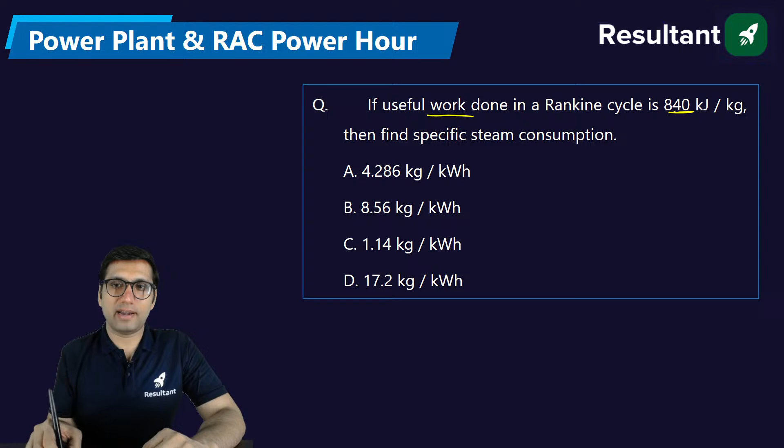Let's quickly cover the first question. If the useful work done in a Rankine cycle is 840 kJ per kg, then what is the specific steam consumption? Whenever such questions come in the exam, you need to know the formula to solve it. The specific steam consumption, also known as steam rate, can be found using the formula 3600 by net work.

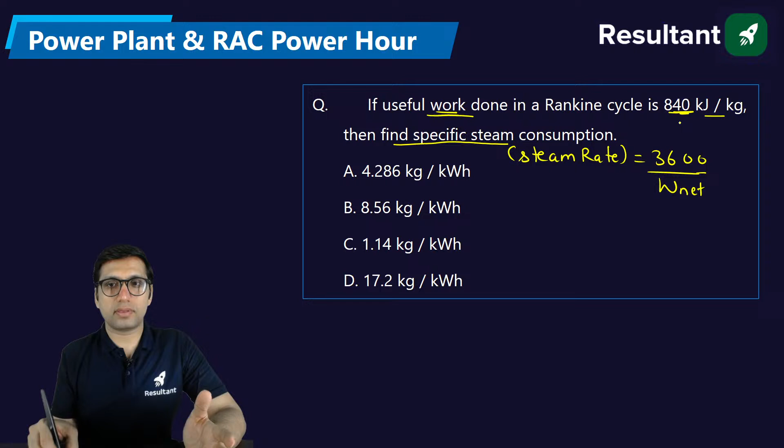In this question, the useful work or net work is already given, right? So you just put the value here: 3600 by 840. The unit of specific steam consumption is kg per kilowatt hour. Okay, solve it and tell me the answer. What is the answer? Tell me, everyone.

So it's all about the formula. For the numerical part, you should remember the formula. If you don't, then no matter how good you are, you would not be able to solve the numericals. So for numerical part, you should know the formula. The answer is 4.2857, approximately 4.286. So that will be the answer for this first question.

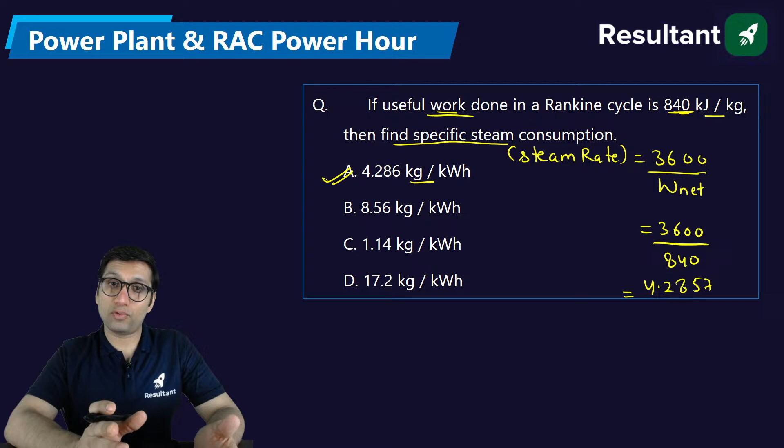So we can, but that's a very less number, guys, come on. Even if you are preparing for RRB JE CBT2, if you think RRB JE CBT2 is still going to happen after a long time, firstly there will be CBT1, then CBT2, then my dear students, there will be CBT2 of SSC JE also, right? And SSC JE CBT2 will be conducted in just 1.5 months, by October. So in the month of October, if SSC JE CBT2 will be conducted, then you should be ready for it.

Next question: which of the following is false for air refrigeration system? You have to tell the false statement, not the true statement. It is cheaper as air is easily available compared to other refrigerants. This air refrigeration system is cheaper, having less cost compared to others. So this is which of the following is false? You have to write the false one.

There is no risk of fire as compared to other refrigeration systems. The weight of air refrigeration system per ton of refrigeration is high. So this is a false statement, my dear, because the main advantage of air refrigeration is written wrong here.

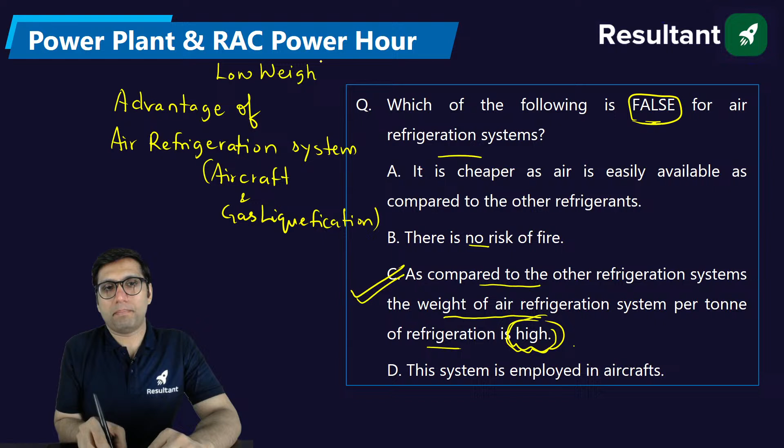Air refrigeration is employed in aircraft, and also gas liquefaction - this is the main application where we use this air refrigeration system. The main advantage is low weight per ton of refrigeration. If you have seen any theory session that I have taken, this is the advantage, and it is being written as a disadvantage here, which is of course not correct.

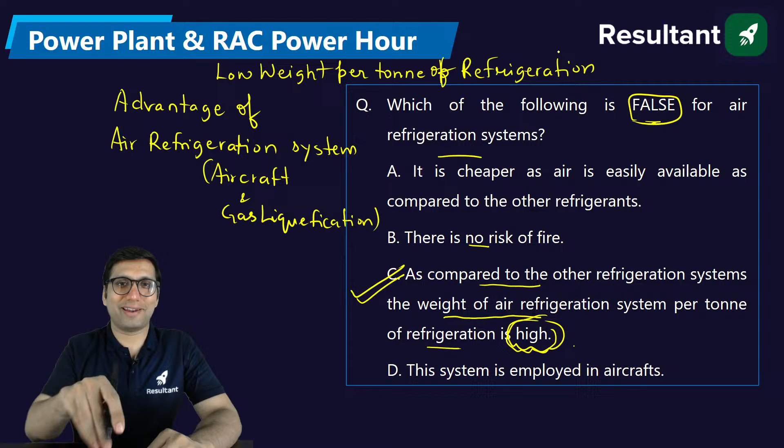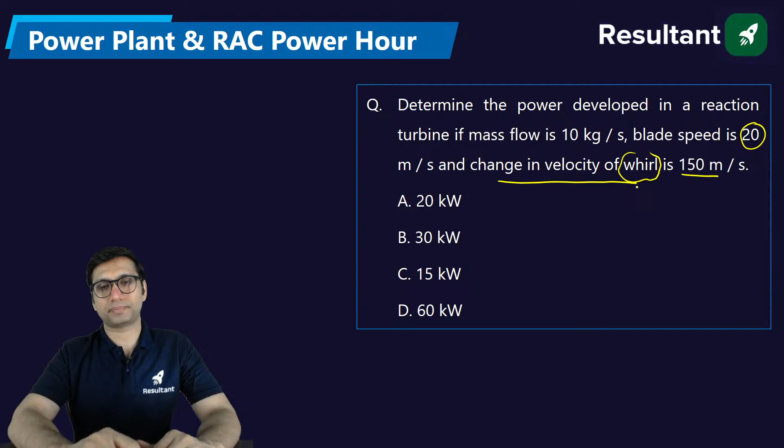Next, determine the power developed in a reaction turbine if the mass flow is 10 kg per second, blade speed is 20, and change in the velocity of the whirl is 150 meter per second. The mass flow rate is given as 10 kg per second. Again, same thing - if you know the formula. Blade speed is 20 meter per second and change in whirl velocity is 150.

But all this data will not be helpful if you don't know the formula for how to calculate the power developed. So how can you find the power developed? The power output of a reaction turbine is equal to mass flow rate into change in the whirl velocity into the blade velocity. Simple, you just multiply all three things and you get the answer. So it will be 10 into 150 into 20, giving you 30 kilowatt. Clear?

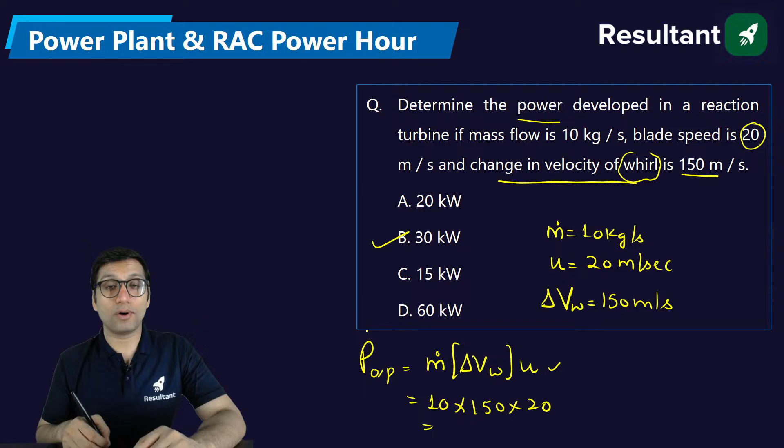If you find any new formula while solving or practicing questions, update it in your short notes for that subject, whether it's power plant, RAC, or any other. Because when you're taking a live class and understand a formula, your brain doesn't retain it forever, it will forget it after a month. If the same question comes in the exam, you'll forget the formula because you haven't revised it. So note down formulas in a short notebook that you must have made for each subject. If not, please make one.

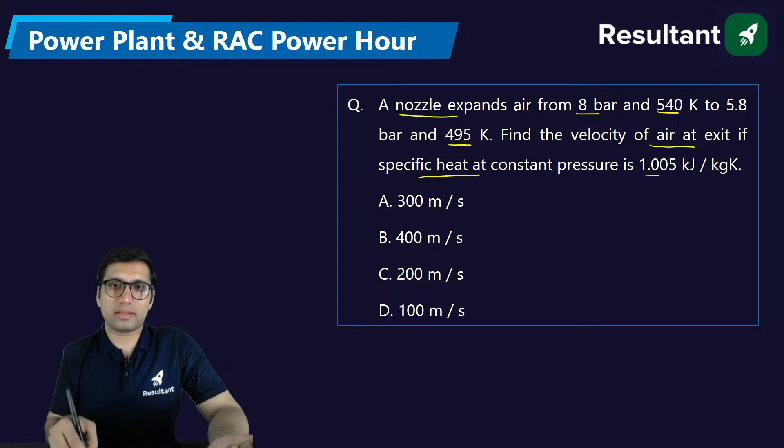A nozzle expands air from 8 bar and 540 Kelvin to 5.8 bar and 495 Kelvin. Find the velocity of the air at the exit if the specific heat at constant pressure is 1.005 kilojoule per kg Kelvin. How do we find the nozzle velocity at the exit? The formula is velocity equals square root of 2000 into change in enthalpy.

In this question, they have not given the enthalpy change directly. Since they have given air, and if we assume air is an ideal gas, then for an ideal gas, delta H equals Cp into delta T. So we can substitute this value: velocity becomes root of 2000 into Cp into delta T. Just put the values and you'll get the answer.

2000 into Cp, which is 1.005. Delta T is the temperature difference, from 540 and 495, so it's T1 minus T2, which is 540 minus 495. If you put the values in, you'll get the answer. Tell me what value you're getting by solving this. Approximately you'll get 300 meter per second. If you use a calculator, you'll get the exact answer.

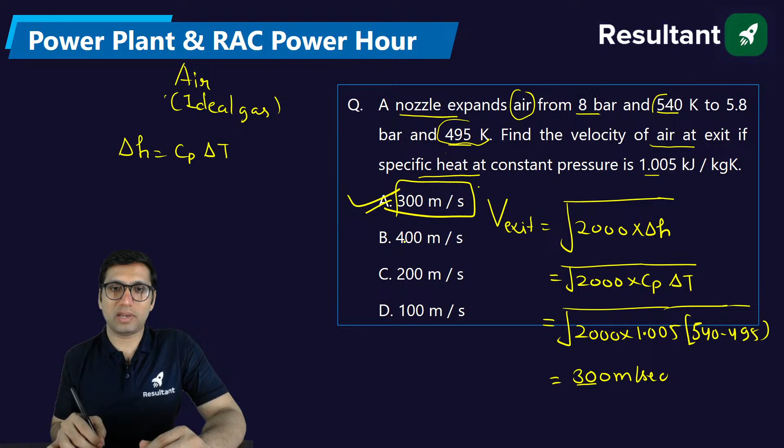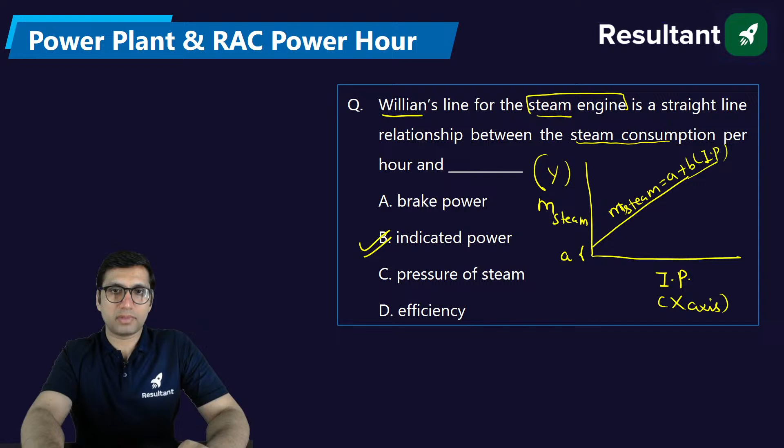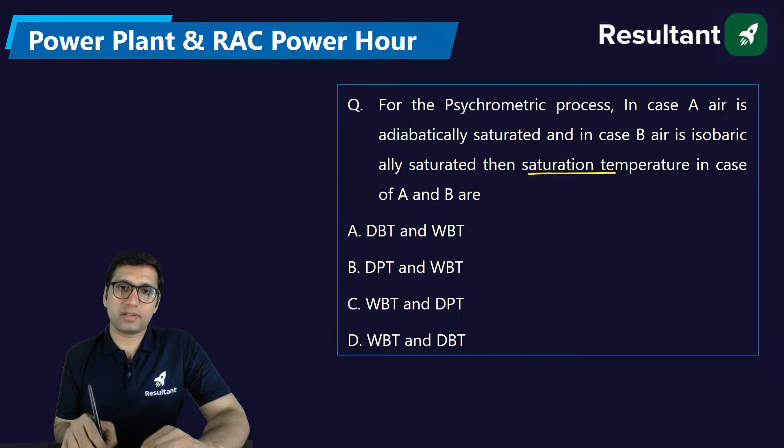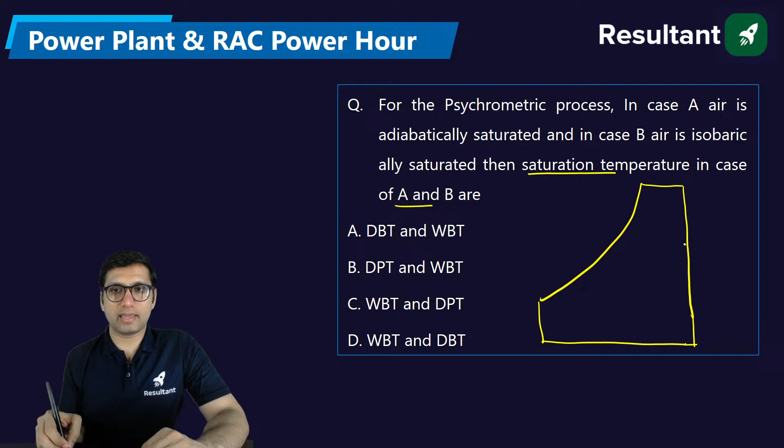For the psychrometric process, in case A, air is adiabatically saturated, and in case B, there is isobaric saturation of air. Then what is the saturation temperature in case A and B? Psychrometry, which you've studied in refrigeration and air conditioning, involves following two types of cases. In case A, we are trying to saturate our air adiabatically.

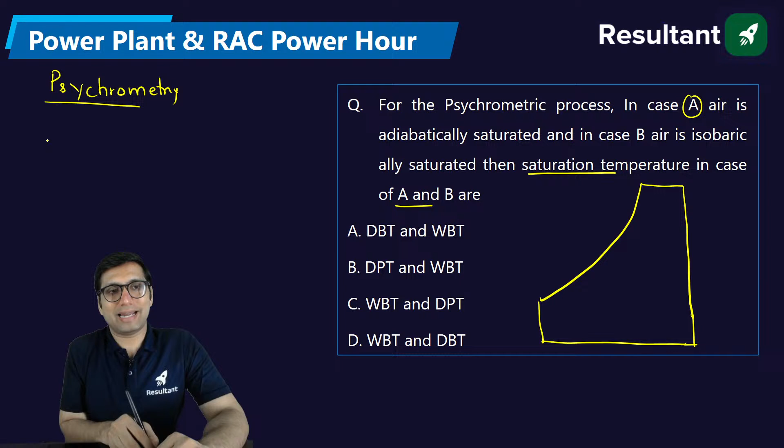With respect to psychrometry concept, two things are important. When we say adiabatic, with respect to psychrometry we are talking about constant enthalpy, a process where enthalpy is constant. And because enthalpy is constant, the wet bulb temperature is also constant. If you talk about isobaric with context to psychrometry, we are talking about pressure, but which pressure?

Vapor pressure is constant, and vapor pressure represents dew point temperature. Dew point temperature is constant. Dew point temperature means specific humidity is constant. So this is some basic concept that you need to remember.

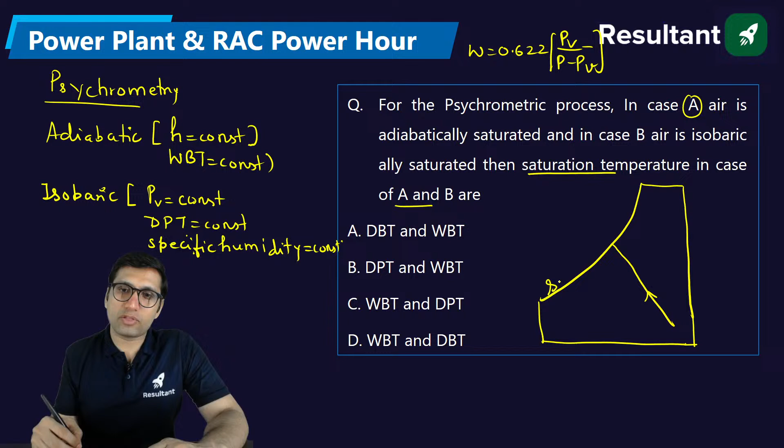Now let us understand how you are doing saturation. This is called the saturation curve. Why is it called saturation curve? Because on this curve, your relative humidity becomes 100%.

We have 100% relative humidity, air is fully saturated. In case A, we are trying to reach our saturation curve across constant enthalpy or constant wet bulb temperature. In case B, air is isobarically saturated. How do you do isobaric saturation? Like this.

Case number B: when we do isobaric saturation, that means pressure is constant, that means specific humidity is constant, and that means dew point temperature is constant. So in case A, you will get wet bulb temperature, and in case B, you will get dew point temperature. Clear? So option C will be the right answer.

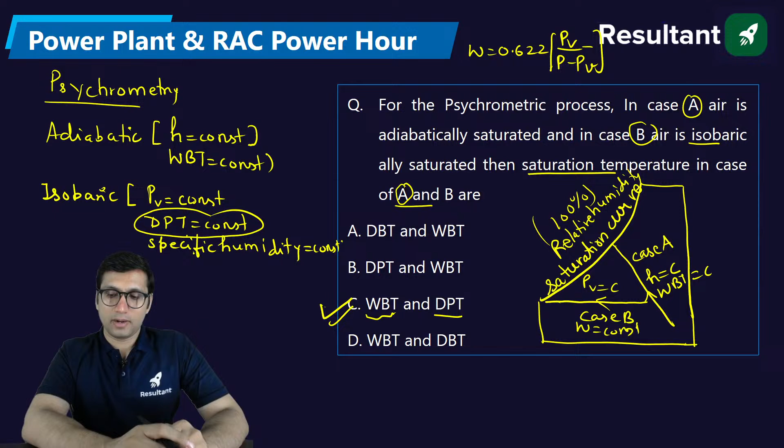Understood, everyone? Don't just remember this thing, don't just mug it up, because the concept is important. Next question.

Consider the following statement regarding steam turbine. The main objective of reheating in the steam turbine is to improve the dryness fraction. Why do we do reheating in the steam turbine? The main objective is to improve dryness fraction. Correct. The reason why reheating was preferred or used in the first place for the steam turbine is to improve the dryness fraction.

Reheating is to remove the wetness at the exit of turbine, because if we don't do that, the moisture at the exit of turbine will cause deterioration of the blades. It will cause erosion of the blades, the material of the turbine blades. So that is why we need to improve the dryness fraction. This is correct.

Reheating decreases the specific steam consumption. How does it decrease specific steam consumption? What are the effects of reheating? When we do reheating in the steam turbine, the main purpose is to improve dryness fraction. This is the main reason why reheating was adopted in the first place.

But with the effect of reheating, the net work will improve, and if net work improves, then steam rate, also called specific steam consumption, equals 3600 divided by net work. If net work is going to improve, this is going to decrease, right?

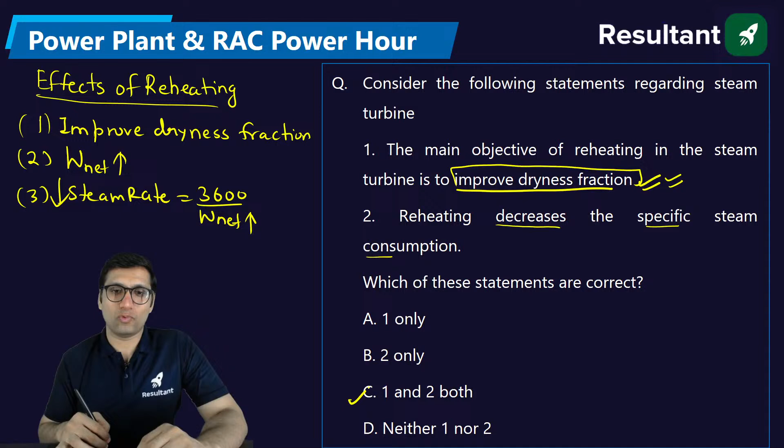So both the statements are correct. 1 and 2 both are correct.

Next is, consider the following statement about the compounding of the steam turbine. Now, compounding is a term which when we study about steam turbine, it is particularly the case where we try to remove some problems of simple impulse turbine. The simple impulse turbine has got some issues. Those issues have to be resolved, and because of that we do compounding in impulse turbine, not in reaction turbine.

Loss of kinetic energy at exit and high rotor speed are the two problems in the impulse turbine. To solve these problems, the solution is compounding. So the reason we do compounding in impulse turbine is to solve these two problems. These problems are not present in reaction turbine, so we don't require compounding for reaction turbine.

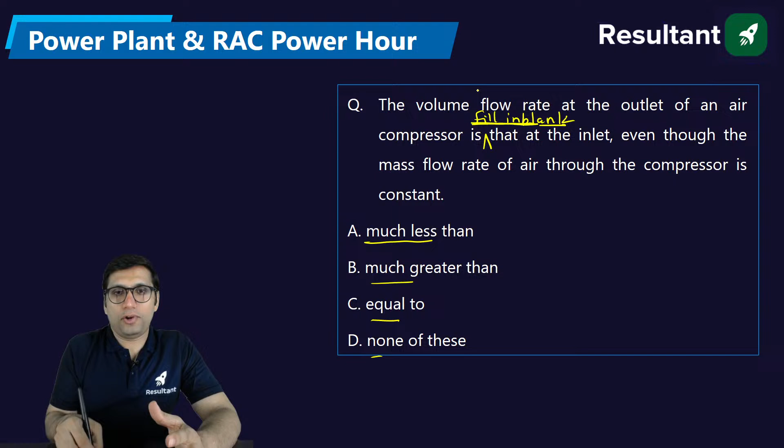So there are two things: one is called volume flow rate and one is called mass flow rate. Volume flow rate is also called discharge. But here, when we say volume flow rate, discharge at the outlet of compressor, is it much less than that at the inlet, even though mass flow rate is constant? That means what they are trying to say is, if in the compressor mass flow rate at inlet is equal to mass flow rate at the exit, that is, if continuity equation is maintained in the compressor, what do you understand by this?

Kya hoga sir, non-tech to accha nahi ho pa raha hai. So Gautam, you need to improve in the non-tech, right? The solution to any problem is not cribbing about the problem, but working on the problem. If you just keep worrying that non-tech accha nahi hai, to non-tech sochne se accha nahi ho jaayega. Agar main mota hoon, if I'm fat, if I'm bulky, if I'm overweight, then just by thinking that one day I will become lean, I will not become lean. I have to sweat it out, I have to do some exercise so that I can become lean. So the solution to any problem is to work on that problem so that you can come out with some good result. Non-technical sabhi ka problem hota hai. Abhi main bhi, if I have to give RRB JE exam CBT, let's say suppose, I may not be able to clear CBT 1 because I have not studied non-tech from a very long time, maybe from last 10 years. So you have to study non-technical, right? Just study it. Clear?

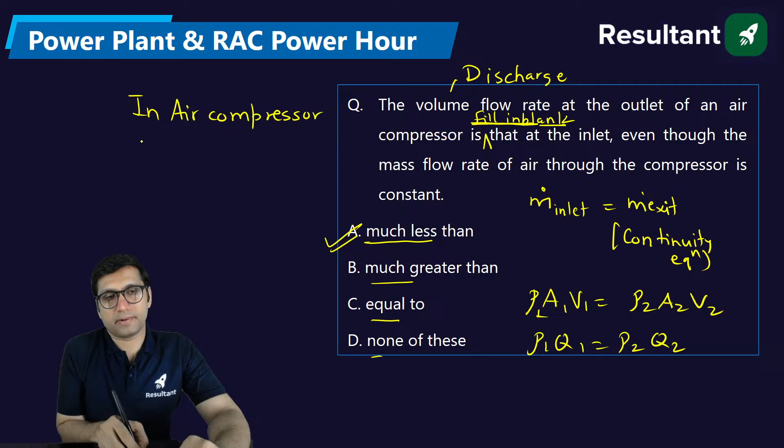So mass flow rate is equal to what? It is density into area into velocity. This is mass flow rate at the inlet: rho 1 A1 V1 is equal to rho 2 into A2 into V2. Now we know it very well that if mass flow rate is same, and discharge, we can write this as rho 1 into Q1 is equal to rho 2 into Q2. We know it very well that in air compression, try to understand the concept: air is compressed. And what is the meaning of compression, my friend? Compression means that pressure will increase. P2, pressure at the exit, will be more than pressure at the inlet because it is a compression. And we know that density is a function of pressure, so density at the exit will be more than density at the inlet. So in this particular case, in order to maintain mass flow rate constant, if rho 2 is more than rho 1, then Q1 should be greater than Q2. Are you getting my point? If this quantity is more, then this quantity has to be less in order to maintain constant mass flow rate.

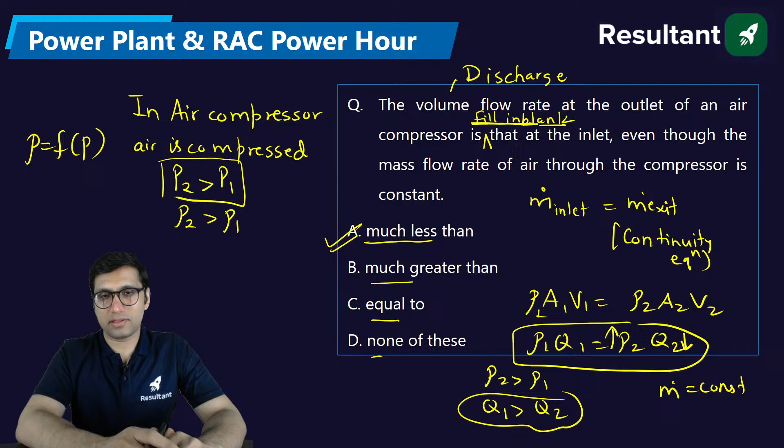Clear? So that is why discharge will be less as compared to inlet. Volume flow rate will be less. Clear to everyone? Is it a clear concept? Samajh mein aaya? Very simple concept, because we have to maintain constant mass flow rate, and how can it be maintained constant? We have to decrease the discharge accordingly because density is already increasing at the exit.

The isentropic efficiency of a compressor is defined as a ratio of the isentropic compressor work to the...

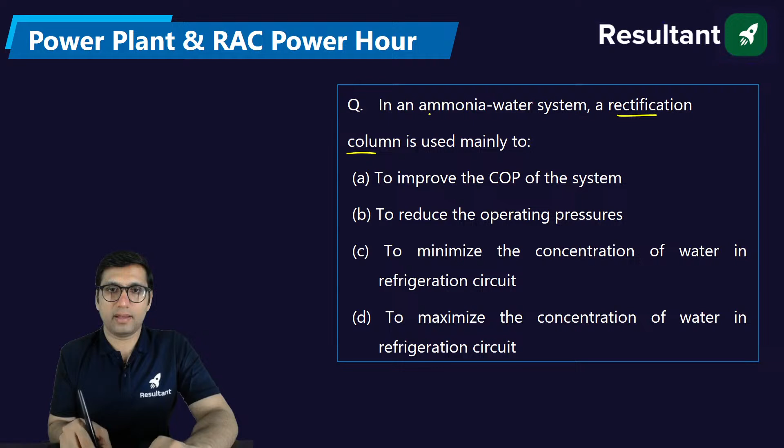Next, in an ammonia water system, a rectification column is used mainly to... why do we use a rectifier? Why use a rectification unit in an ammonia water vapor absorption refrigeration system? Why do we need a rectifier here?

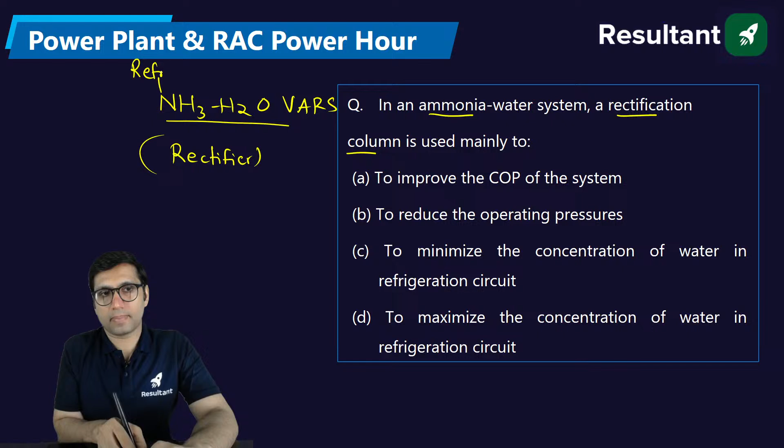In this system, ammonia acts as a refrigerant while water acts as an absorbent. Since ammonia is the refrigerant, it is the main fluid performing the cooling effect. But the problem is, when we heat the ammonia refrigerant, some of the water also becomes vapor. If this water vapor condenses in the condenser and goes into the evaporator, it might freeze and block the evaporator, especially the expansion valve.

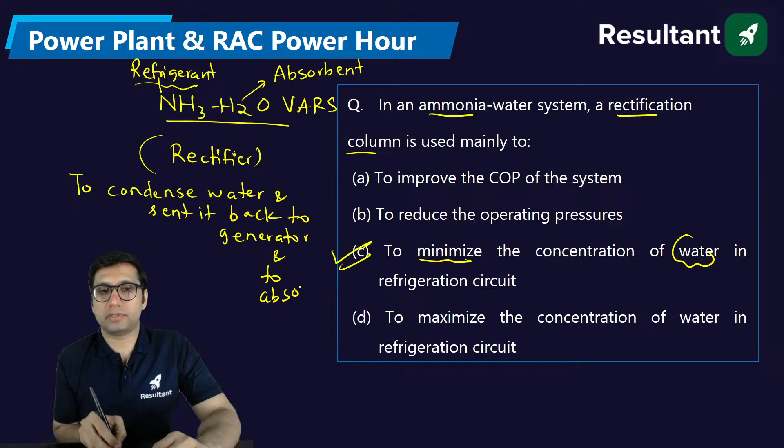So in order to prevent that, we need a rectifier that will minimize the concentration of water. Actually it should be elimination, but I don't know why they have written minimize - it's the only suitable option here. The main purpose is to condense the water and send it back to the generator, and then finally to the absorber. So this is the main purpose - it basically removes the water completely.

The refrigeration system of an ice plant is working between temperatures of -5 and 25. This is a good question, and I have some expectation that this question might appear in your exam. As a teacher I feel this question is very important.

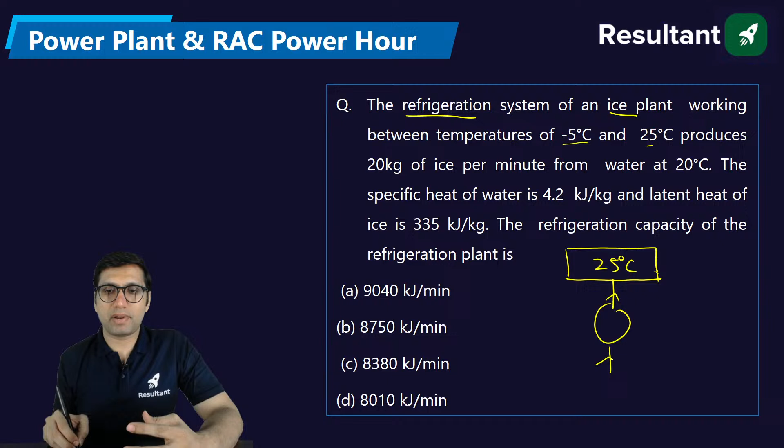There is an ice plant working between these two temperatures, -5 and 25. What do you understand by this? It means the highest temperature to which heat is rejected is 25, and the lowest temperature maintained by the ice plant is -5. This is the surrounding temperature, and this is the temperature of the system which has to be maintained. Now please read the question carefully.

The refrigeration system of an ice plant maintained between these temperatures produces 20 kg of ice per minute from water at 20 degrees Celsius. Specific heat of water is given and latent heat of ice is also given. What you have to find here is the refrigeration capacity of the refrigeration plant.

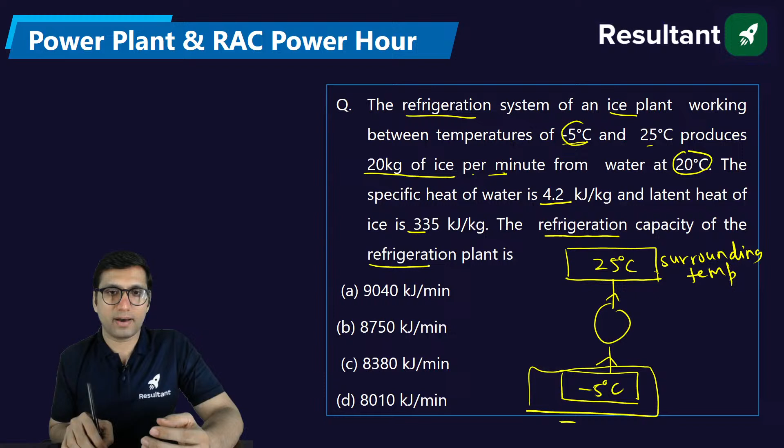So what do you mean by refrigeration capacity? Refrigeration capacity is also called cooling capacity. How will you find this cooling capacity? What is actually happening here?

Actually what is happening is the water which is at 20 degrees Celsius - we are firstly reducing the temperature of the water to 0 degrees Celsius. Then at 0 degrees Celsius, we are trying to make ice. And then from the ice at 0 degrees Celsius, we are converting it to -5 degrees Celsius ice. This is ice maintained at -5 degrees Celsius. This is what must be happening, right? I hope it is clear to all of you.

So the water is firstly reduced in temperature - sensible heat is removed from the water. This is cooling capacity, when we say total cooling capacity. So suppose you are having a refrigerator at your home, right?

And you want to freeze water and convert it into ice or ice cubes - we all use ice cubes in our home, right? So we just keep the water in our freezer. Water was at 20 degrees Celsius. If you calculate the total cooling capacity of the refrigerator, it will firstly cool the water to 0, then at 0 make ice, and then that ice will be converted to -5 degrees Celsius ice.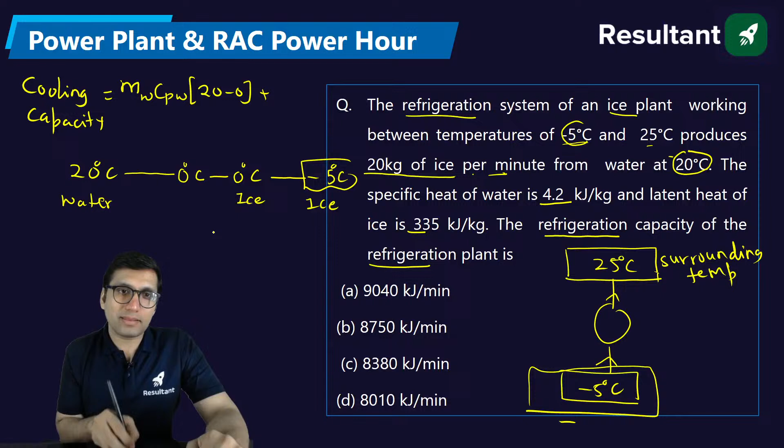Next is latent heat transformation of ice. Since water will be converted into ice, the mass of ice formed will equal the mass of water, that is 20 kg of ice is formed. So 20 kg of water will be there in latent heat. Now you might think we should also add mass of ice into specific heat, but let's see if we can do that. Putting the values here, if I take mass outside, 20 is common since water is converted into ice, so mass will be outside.

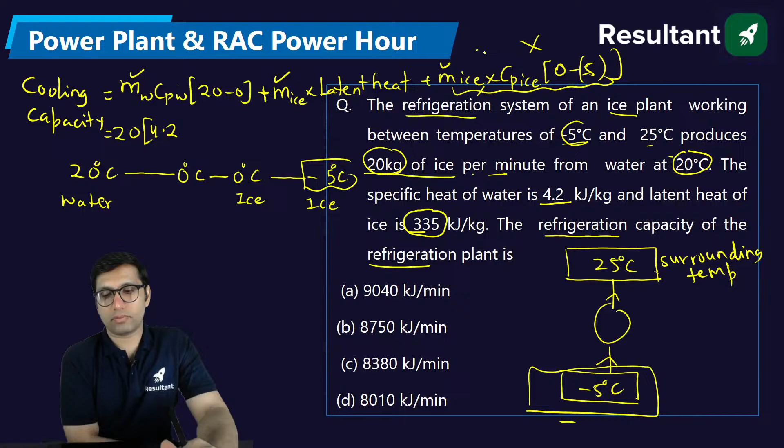Specific heat is 4.2 for water. But the problem is, why can't I use this formula? Because to use the third formula, I need data about the specific heat of ice, and there should be that data provided, but it is not given to us. So I can't use this formula, since I don't have information about the specific heat of ice.

So this will just be 4.2 into 20 plus 335, with the mass outside. Just multiply with this, solve it, and you will get the answer. How much are you getting? I will not be using this formula because specific heat of ice is not known to us. If we had that information, we would have added this too, but it won't have much effect. So what will be the answer? Tell me.

Yeah, try to solve this, everyone.

If you are scared about the level of the question, I'm telling you, we are solving some CBT 2 level questions here, whether you are preparing for SSC or RRB. That's why the question level is like that. But I don't think it's too much calculation - there may be some high level concept, but not too much calculation.

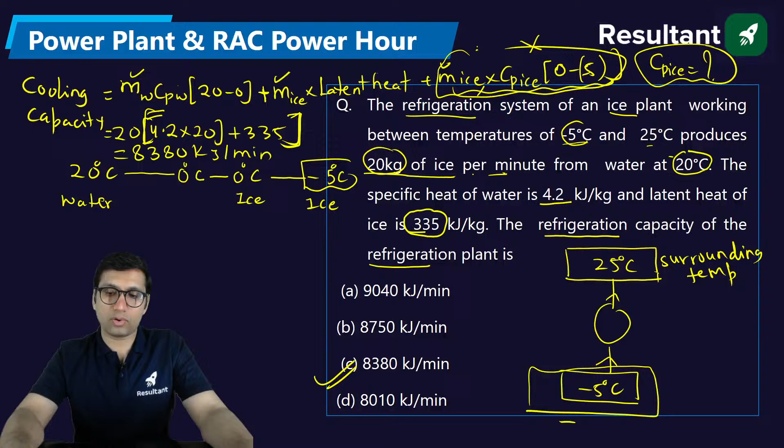Next, consider the following statements. The volumetric efficiency of a reciprocating compressor depends on: clearance factor, pressure ratio, index of expansion, index of compression. Of these statements given above, which of the following is correct? Option 1 and 2 are correct.

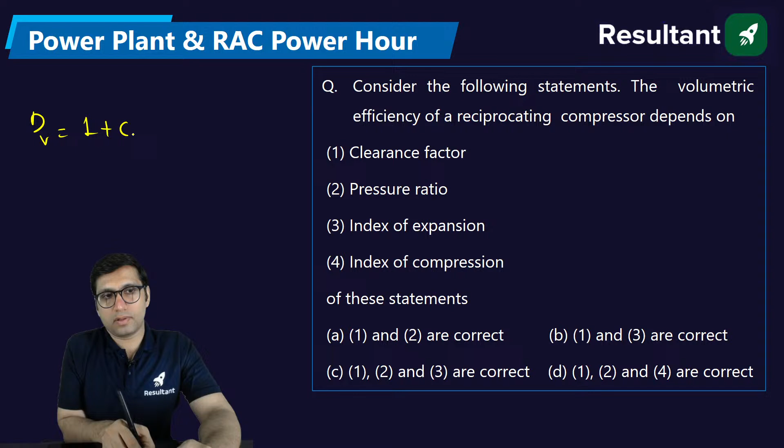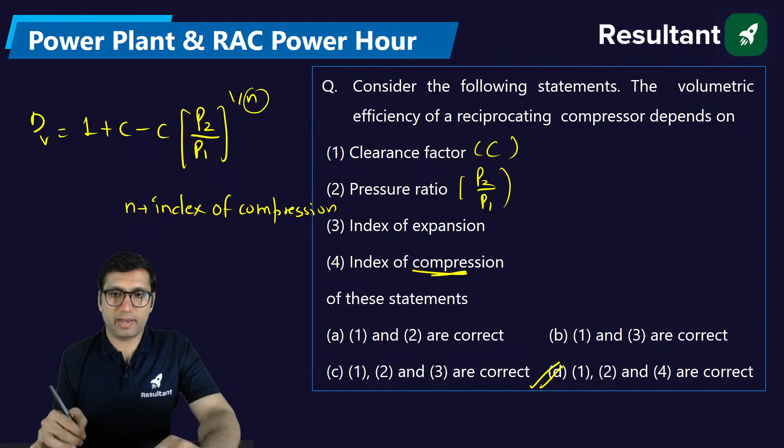Volumetric efficiency of a reciprocating compressor depends on these terms - this is the formula for volumetric efficiency. In this, all terms are mentioned: C is the clearance factor or clearance ratio, pressure ratio is this term. Index of expansion - now this N is not index of expansion, it is index of compression, because it is a compressor. So this will definitely represent index of compression, not expansion. The answer will be 1, 2 and 4. Is it clear to everyone?

Next, the degree of reaction for a turbo machinery in which heat drop in the moving blade is 8 and fixed blade is 12. Turbo machinery includes different devices - whether it is a pump, turbine, or compressor - they all come under turbo machinery.

In all these applications of turbo machinery, we have to find the degree of reaction using this common formula. In the numerator, we keep the heat drop or enthalpy drop of the moving blade - whatever data of moving blade is given, put it in the numerator. In the denominator, add the total of both moving and fixed blade data. So moving blade enthalpy is 8, and the sum of moving and fixed blade will be 20. So it will be 8 by 20, that is 4 by 10, that is 0.4, and 0.4 means 40%.

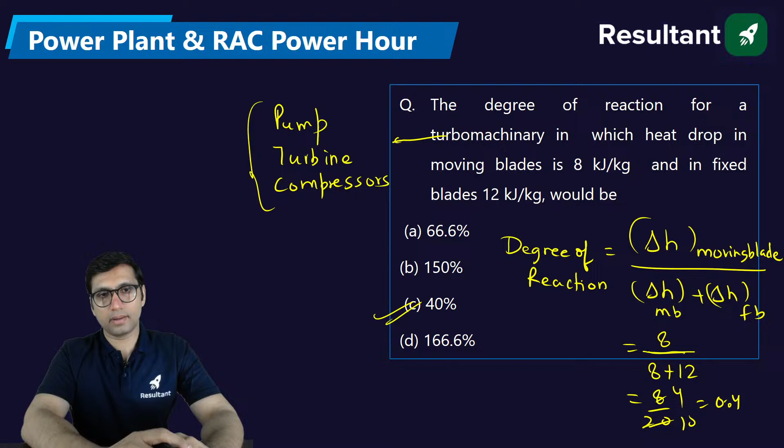Clear to everyone? Next question.

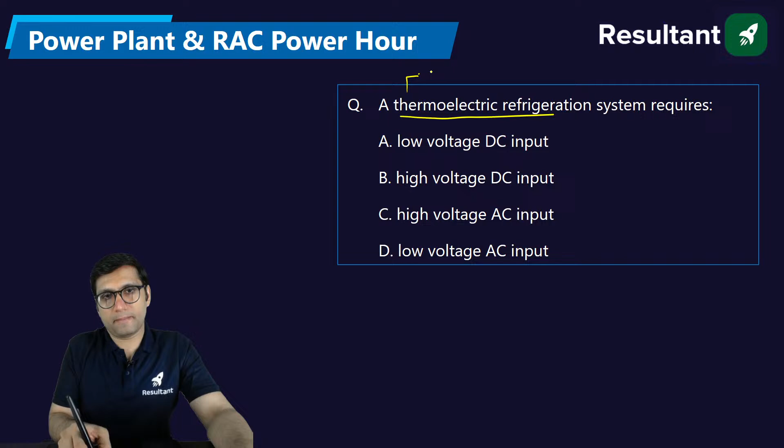A thermoelectric refrigeration system is basically a small refrigeration system which may be used for cooling of electronic components.

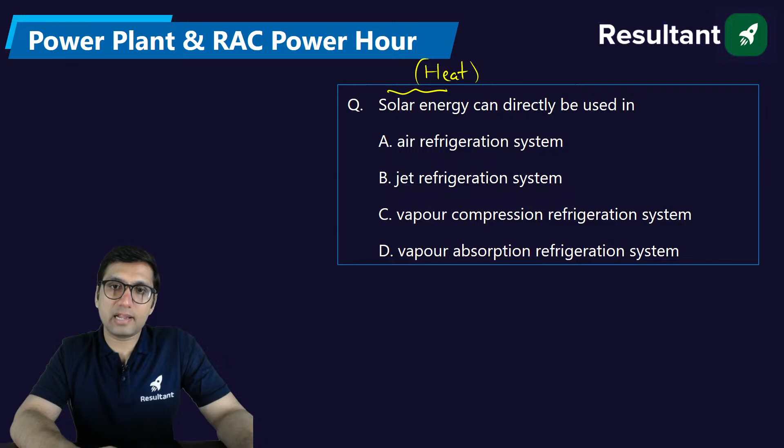Solar energy is basically heat, because most of the solar energy contains heat energy. And if you are using heat energy, then which of the following is the application of refrigeration system which uses heat energy? So heat energy is used in the vapor absorption refrigeration system. It is also called heat operated refrigeration system.

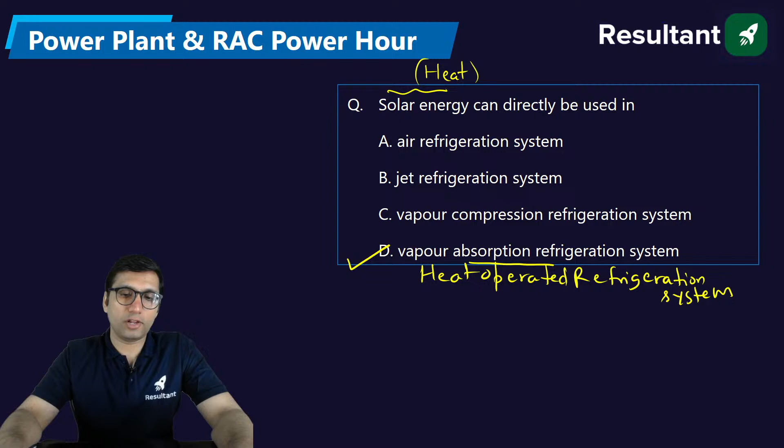Anyways, I must tell you one thing, that those who have cleared CBT1, obviously you will be in need of practicing some good questions. Those who have not cleared CBT1, of course there will be some other exams, right? You won't be sitting idle, waiting for the other exam. You have to be prepared for that, right?

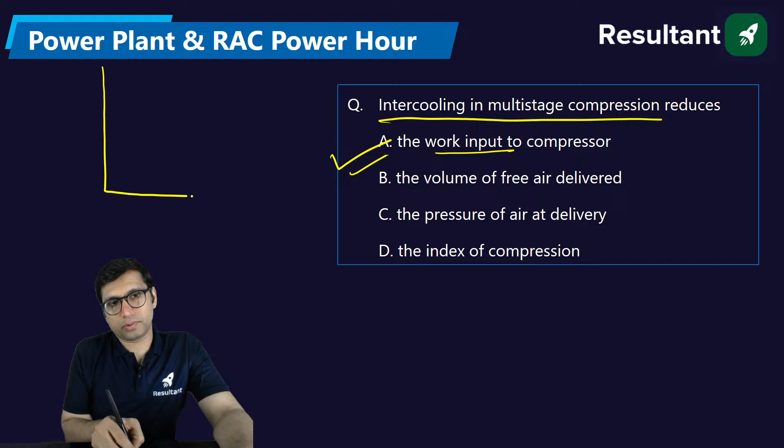Intercooling in a multi-stage compression, what is the purpose of intercooling? It is reducing the work input. So why do we do intercooling in multi-stage? First of all, compression can be done in a single stage also. What is the main purpose of a compressor? Compressor is basically used to compress the air which undergoes suction, and it will be compressed to very high pressure. Suppose we are compressing it from pressure 1 to pressure 2, that can be done by a single stage also. But when we do single stage compression, the problem which arises is majorly two problems. One is the problem with work input, which depends on pressure ratio. In single stage compression, pressure drastically increases, it's a high pressure ratio, so because pressure ratio is very high, the work input will be very high. That is the problem in single stage.

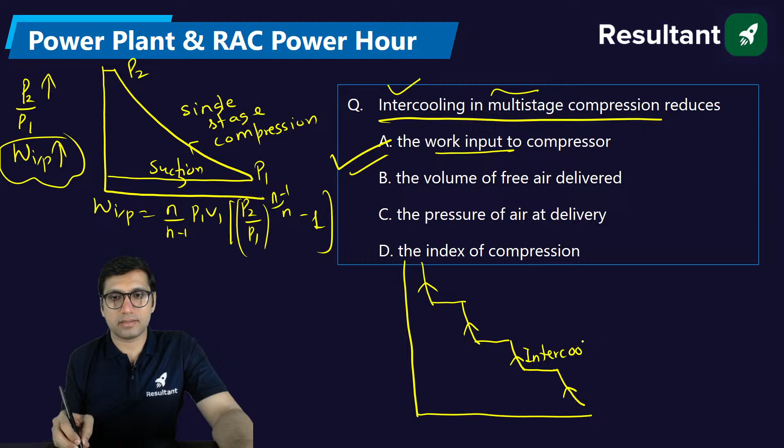So one of the reasons why we do multi-stage compression: when compression is done in multiple stages, between each stage of compression we follow intercooling, that is cooling means heat rejection between the stages. So intercooling is used between the stages, between each stage of compression, and with the help of this, work input is reduced.

we have got after 5 years, and those who have not crossed 36, even I have not crossed 36, you are still having the opportunity to be employed in India's largest central government company, which is Indian Railways, and you get so much benefit. You can ask Vikas Sir, he is just chilling out there. He is having 6 months of training, and he is also studying during the training, but while training he is also living in the apartment given by Railways. Food is also provided by them, and he's having more than 50,000 per month salary during the training, only 53,000 something. Food and home accommodation is provided by railway. Apart from that, he will be also traveling. So much of benefit. And when you become a JE, there are other benefits. When you get promoted to section engineer, more benefits. So just think about this, why you need to be selected as a JE in Indian Railways.

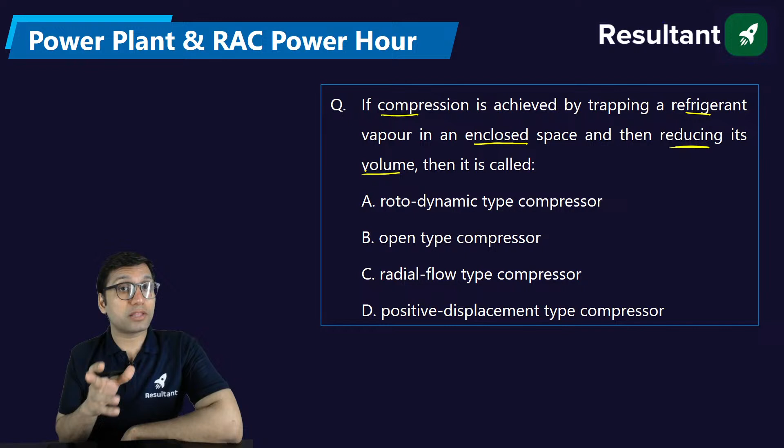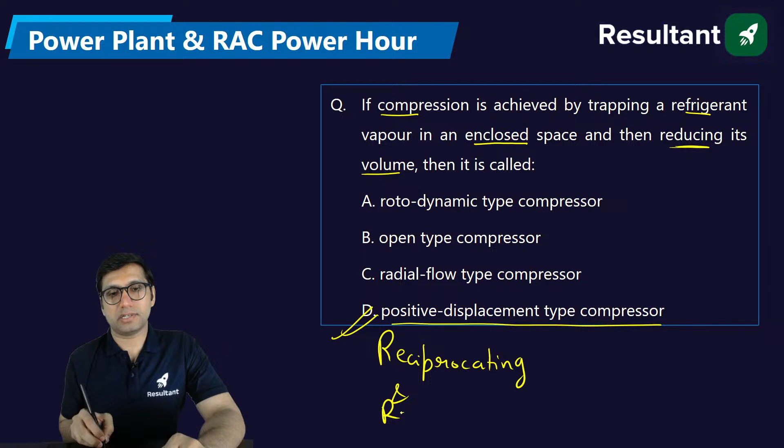If compression is achieved by trapping a refrigerant vapor in an enclosed space and then reducing its volume, it is called this. So what we are trying to do here is compression, but for that we make the refrigerant enter into a closed space, and then slowly reduce its volume and increase the pressure. This process of first allowing the vapor to enter into a large volume and slowly reducing the volume and increasing the pressure is called positive displacement type compression. This is the principle of positive displacement compression. In this, we have reciprocating compression, which comes under positive displacement, and rotary compression, which also comes under positive displacement compression.

What is the disadvantage of using ammonia as a refrigerant? Ammonia is used in many applications, but it has some disadvantages. The first disadvantage is that it is toxic in nature. So what are all the things mentioned here? Ammonia is toxic in nature, yes, it is a toxic refrigerant. Toxic means something which is not good for the environment.

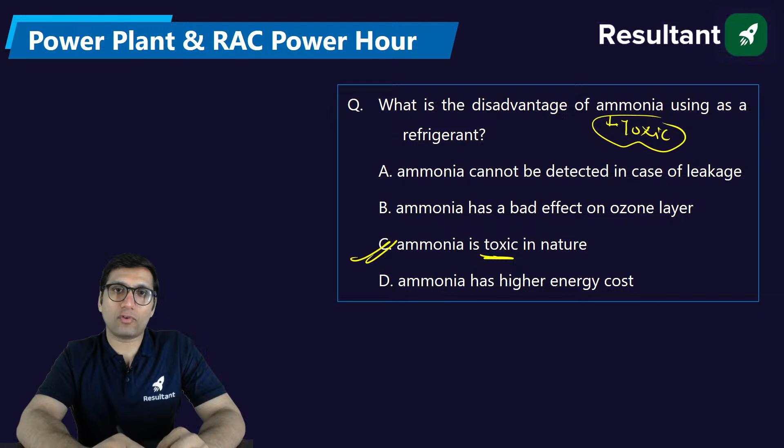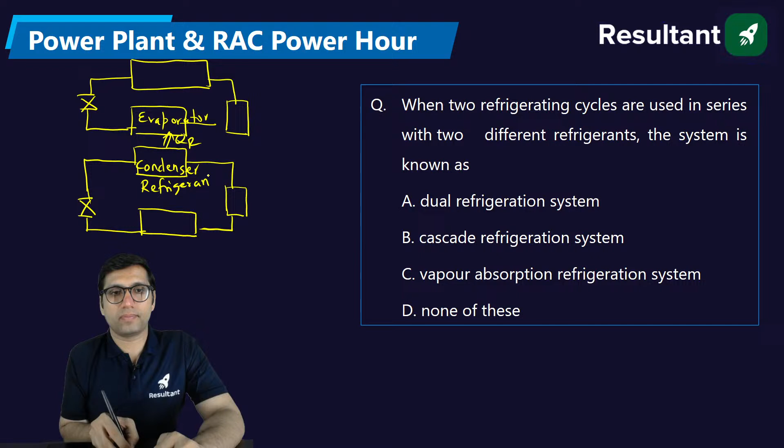When two refrigeration cycles are used in series with two different refrigerants, the system is known as this. We are using two systems. One is this vapor compression system, and this is another vapor compression system. These two vapor compression systems are connected in series connection. And how are they connected? The condenser of the lower system will reject its heat to the evaporator of the upper vapor compression system. So this one will be having refrigerant 1, a different refrigerant, and this will be having a different refrigerant. This type of arrangement of vapor compression cycles is called a cascade refrigeration system.

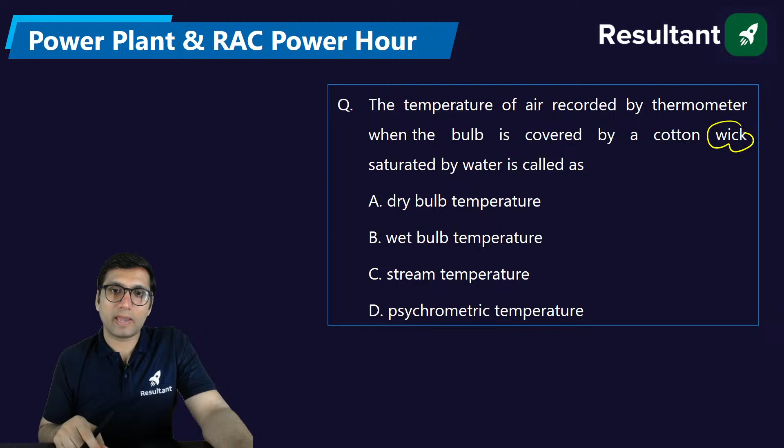The temperature of the air recorded by a thermometer when the bulb is covered by a cotton wick - wick basically means a kind of cotton which absorbs the moisture. It will absorb the heat of the water. So this temperature is called wet bulb temperature. There is a thermometer which is also called a sling psychrometer, and the bulb of this thermometer is covered by a cloth, a wet cloth. This is called the bulb of the thermometer. It is covered with a wet cloth or a cotton wick. So this is called wet bulb temperature.

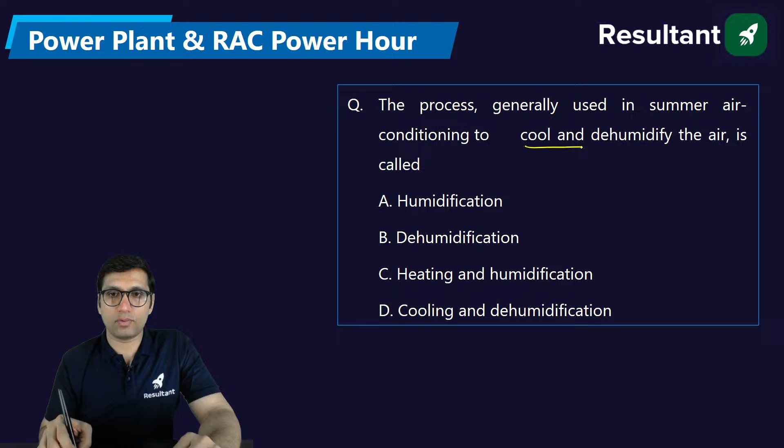The process generally used in summer air conditioning to cool and dehumidify the air - in summer, like right now we use air conditioner, the process which takes place is called cooling and dehumidification. Why do we do cooling and dehumidification? Because cooling is reducing the dry bulb temperature, the temperature of the air, and dehumidification means reducing the specific humidity, which is the moisture. In summer, when we use our AC, what is the main objective? The AC should reduce the temperature and reduce the moisture.

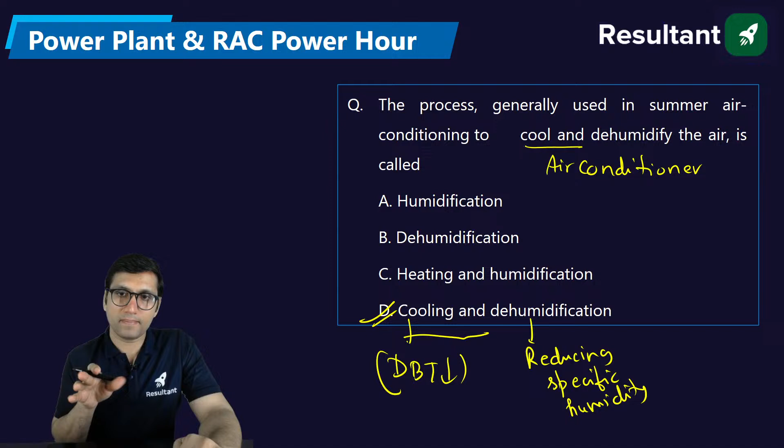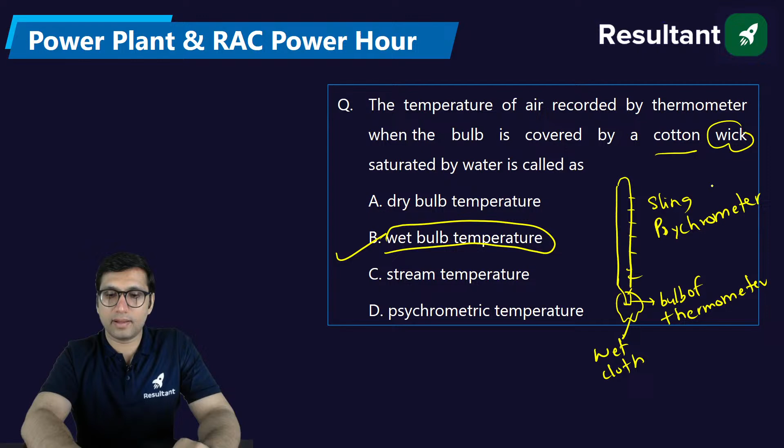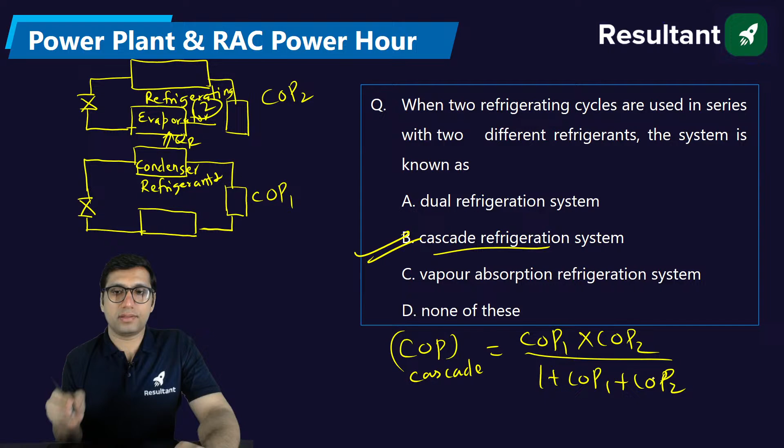Next question. Water at 42 degrees Celsius is sprayed into a stream of air at atmospheric pressure having dry bulb temperature of 40. That means water is at 42, air is at 40 degrees Celsius. And on this air, we are trying to spray hot water because it is at 42, which is obviously at a higher temperature than the air.

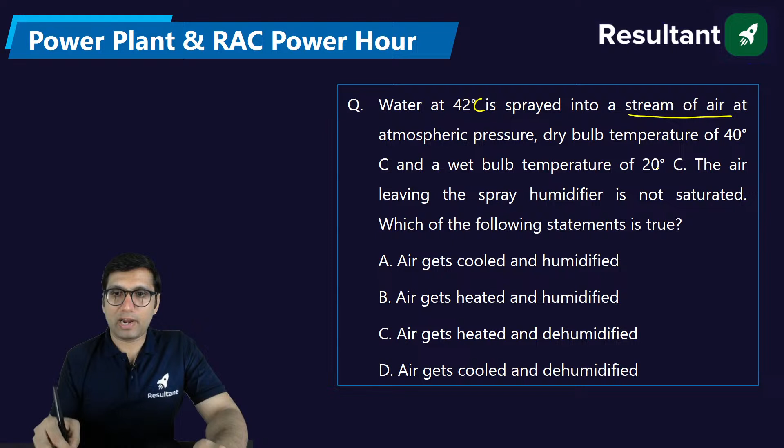The wet bulb temperature of the air is 20. We look at the air leaving the spray humidifier. Why is it called a spray humidifier? Because not only is it spraying hot water, it is also trying to humidify the air. The air which is at 40 degrees Celsius is also getting humidified, so obviously it is getting humidified. That means this will not be the answer — it is a humidifier, the air is getting humidified but not saturated.

But think about the water. Water at 42 degrees Celsius, if sprayed or sprinkled on air which is at 40, obviously the air will get heated up. So air will get heated and humidified, because water is at 42 and air has a dry bulb temperature of 40.

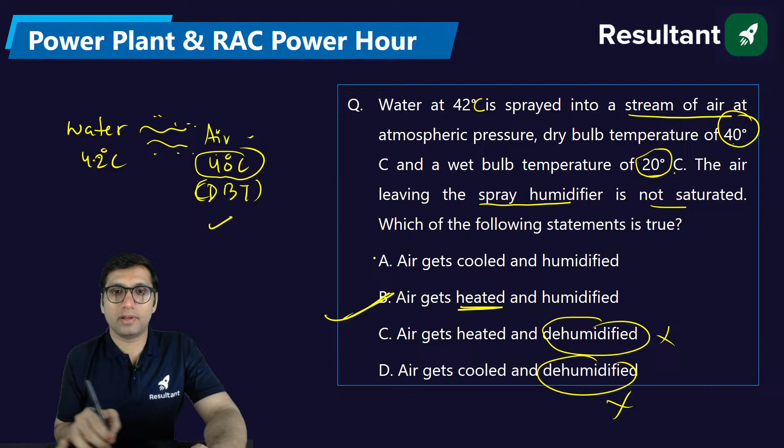And the wet bulb temperature is 20. Obviously air is not saturated because the dry bulb temperature is more than the wet bulb temperature. But because water temperature is more than the air temperature on which water is sprayed, it will get heated up, not cooled. Understood the concept? So it will get heated up, and because water is sprayed on the air, the air will absorb some moisture — it will get humidified.

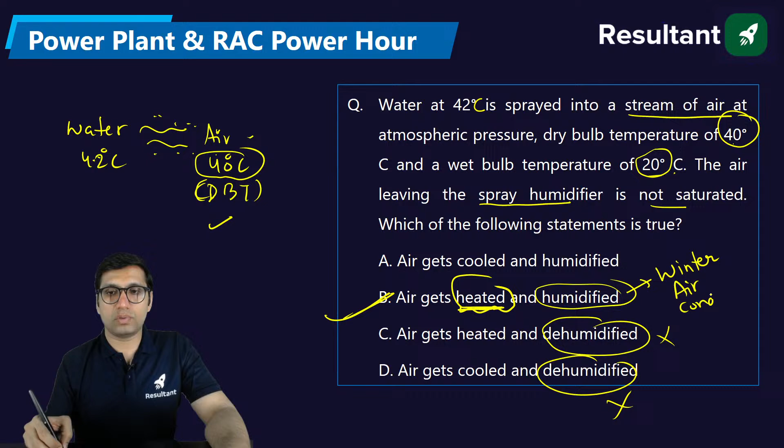What process is this? This is a process used in winter air conditioning. In winter air conditioning, we use this process of heating and humidification.

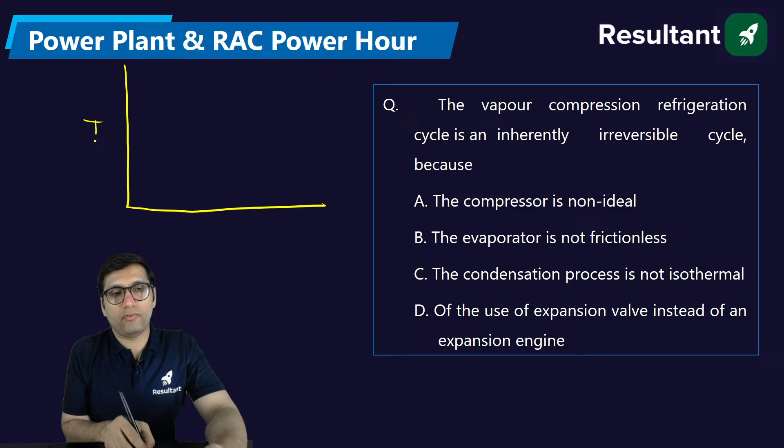The vapor compression refrigeration cycle is an inherently irreversible cycle. Why do we say that? Because if you see the vapor compression cycle, what are the processes involved? Firstly we compress the refrigerant vapor, then we reduce the temperature bringing the superheated vapor to saturation temperature, then we reject heat from the saturated vapor condensing it to saturated liquid, then with the help of an expansion device we reduce the pressure and temperature, and then it goes to the evaporator. So which of these processes is irreversible?

This one. In the vapor compression cycle, we use a device called a capillary tube, and a capillary tube is a throttling device, and throttling, my friend, is an irreversible process.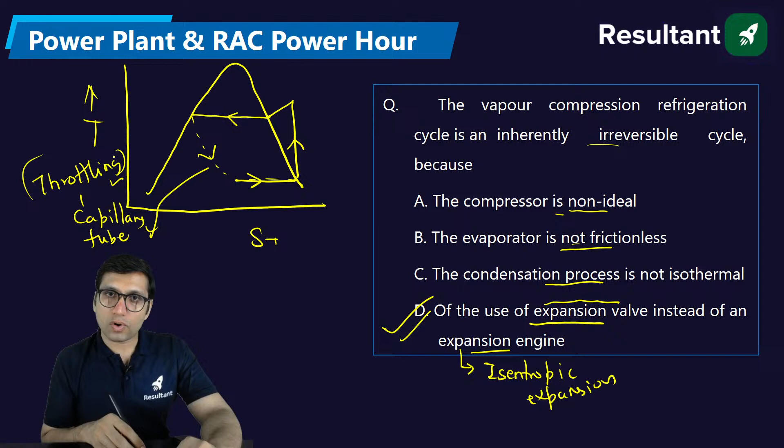The cycle is inherently irreversible because the compressor is non-ideal, the evaporator is non-frictionless, the condensation process is not isothermal, and we use an expansion valve instead of an expansion engine. Why? Because in an expansion engine or cylinder, we have isentropic expansion, and isentropic expansion is reversible adiabatic expansion — that is not irreversible. But the expansion valve we use here is a capillary tube, which is a throttling device, and the throttling process is irreversible.

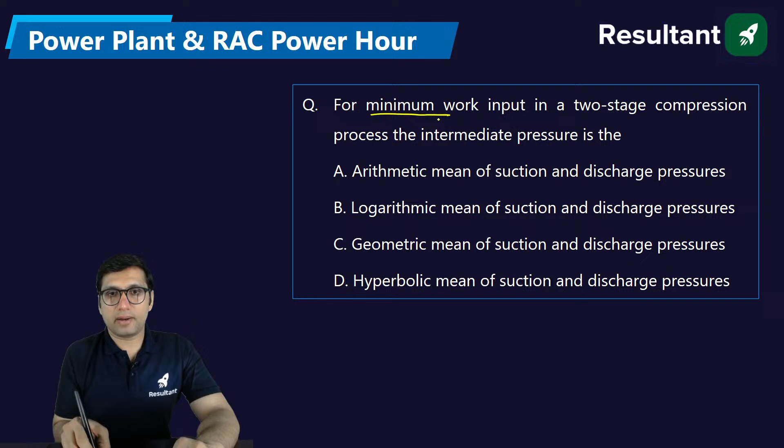For minimum work input in a two-stage compression process, what is the intermediate pressure? Let's say we are doing multi-stage compression — here just two-stage. This is the first stage compression, followed by an intercooling process, and this intercooling is obviously perfect intercooling, because only with perfect intercooling do we get minimum work input. This is the second stage compression.

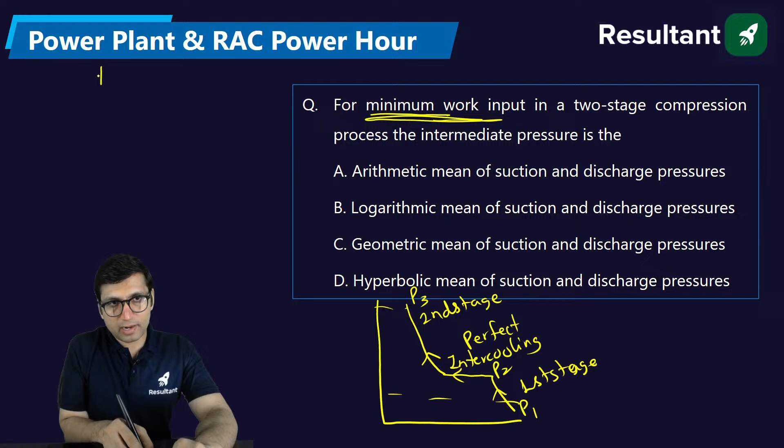So this is P1, this is P2, and this is P3. If it is perfect intercooling in multi-stage compression — guys, don't go anywhere, I'll take 2-3 more questions and then end the session — in the perfect intercooling case, the work input is minimum, and the work input is minimum when it is isothermal compression. So that means it's an isothermal compression, that's why the work input is minimum.

And in isothermal compression with perfect intercooling, the pressure ratio in all the stages becomes equal. Since we are talking about two-stage compression, the pressure ratio P2/P1 equals P3/P2. Also the work in each stage becomes equal — work of the first stage equals work of the second stage. These are a few advantages of perfect intercooling.

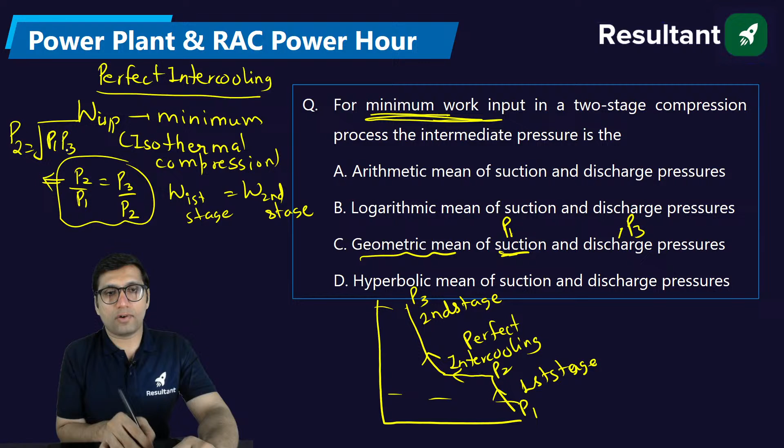But here, since P2/P1 equals P3/P2, that means P2, also called the intermediate pressure, becomes the square root of P1 times P3. What is the meaning of square root? Geometric mean — geometric mean of what? Suction pressure, which means P1, and discharge pressure, which means P3. So it is the square root of, or geometric mean of, suction and discharge pressure.

A condenser of a refrigeration system rejects heat at a rate of 120 kilowatts, while the compressor of the system consumes power of 30 kilowatts. The COP of the system will be...

See, if we are talking about a refrigeration system, work input or power input is equal to heat rejected minus refrigeration effect.

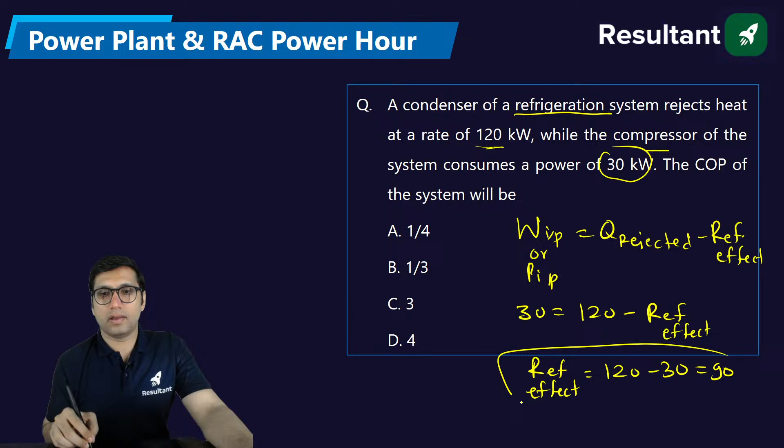In this particular case, we have the data about heat rejection. The power input is given, the heat rejected is given, but refrigeration effect is not given. So refrigeration effect will be equal to 120 minus 30, which is 90. And COP is equal to refrigeration effect or refrigeration capacity divided by power input or work input, which will be equal to 90 by 30. That will be 3.

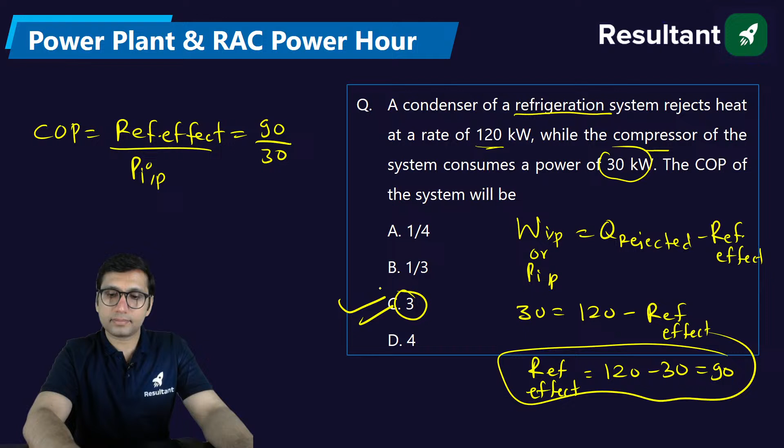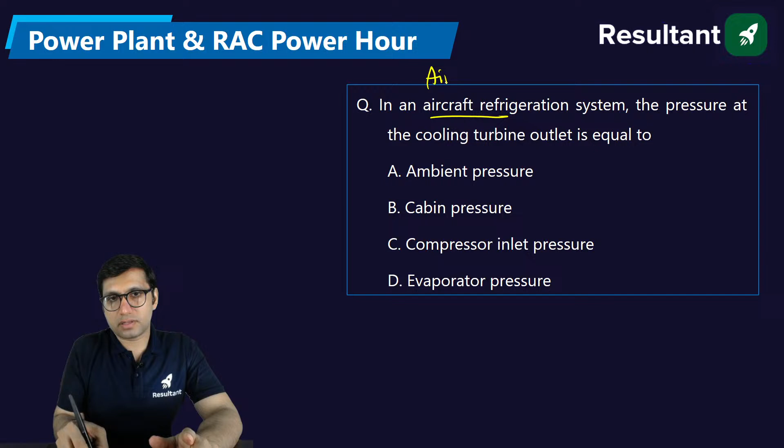In an aircraft refrigeration system, the pressure at the cooling turbine outlet is asked. Aircraft refrigeration system uses air refrigeration system, also called as Bell-Coleman cycle, reverse Brayton cycle.

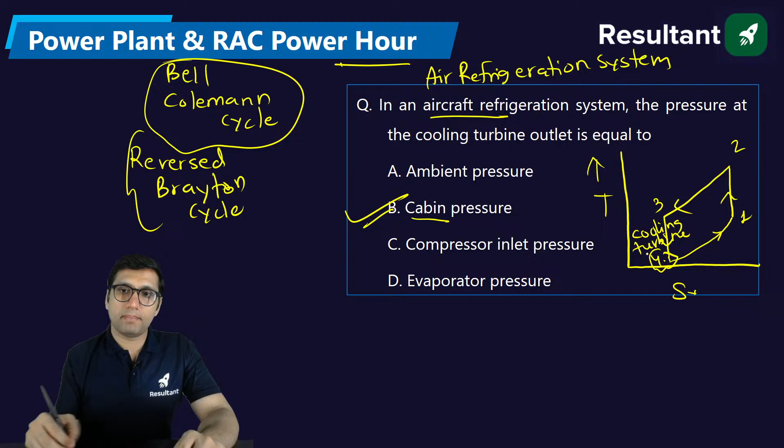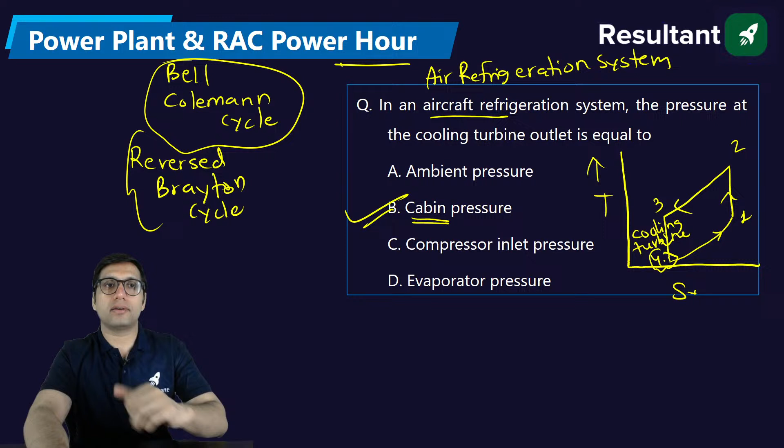So the pressure at the exit of the turbine is called cabin pressure. Why is it called cabin pressure? Because the turbine reduces the pressure and temperature of the air, and then that cooled air is supplied for cooling purpose to the cabin, where people are sitting. Cabin is the place where the passengers sit.

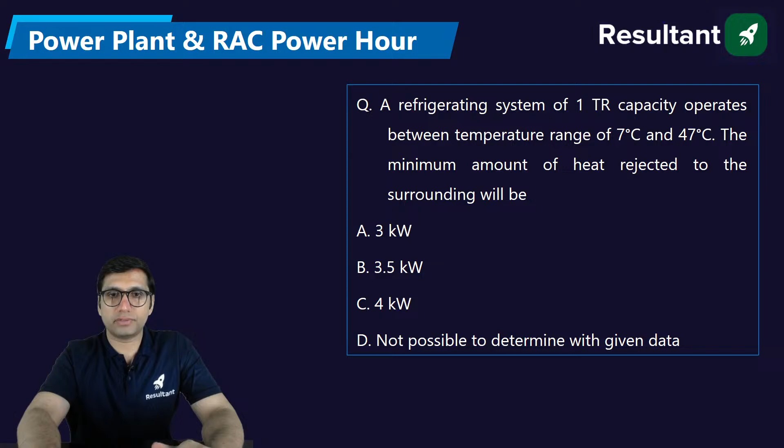All the other questions will be taken up in some other sessions.